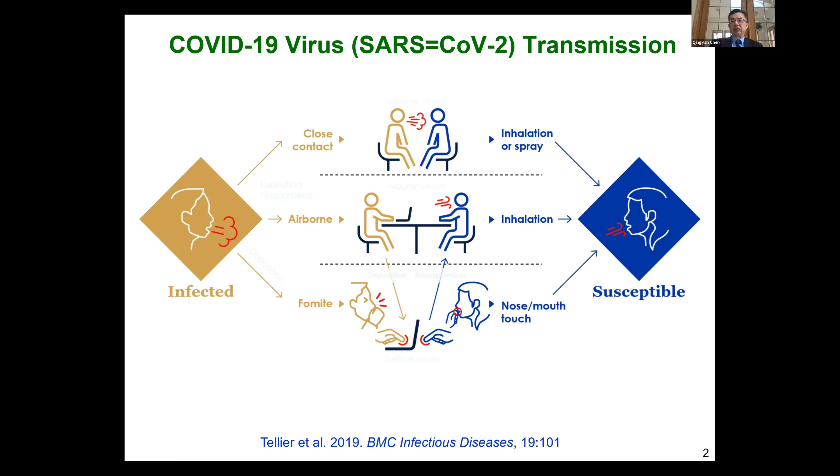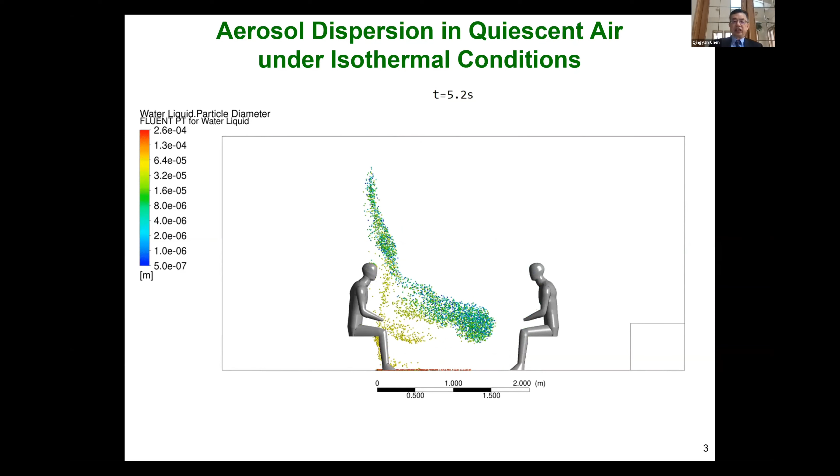However, you see those green particles, which are less than 20 microns. They can travel a very long distance, and definitely the 2 meters social distancing is not enough. And therefore, we are going to focus on this part, particle transmission.

However, this type of air supply is really terrible for COVID-19. That is because if somebody generates virus droplets in this cabin, they will be recirculated and brought to other passengers.

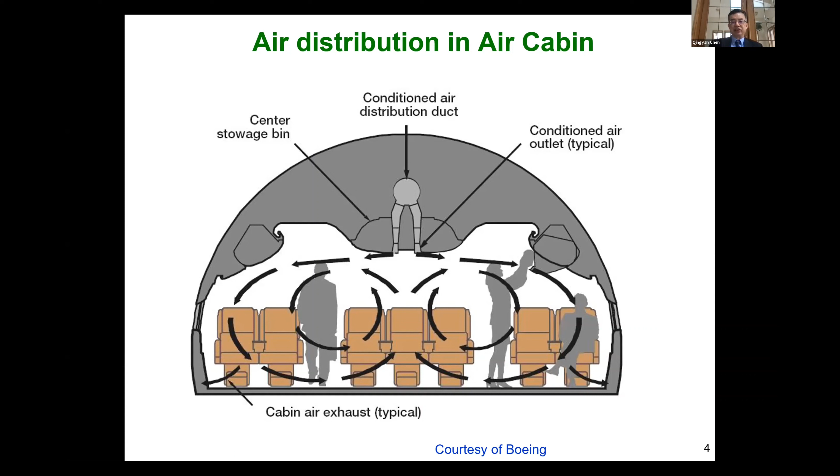And I'd like to use two examples to illustrate airborne transmission in an airplane. The first example is a much more proven example, because it has been studied by many people in the past. And this case is the SARS case in 2003, in a flight from Hong Kong to Beijing.

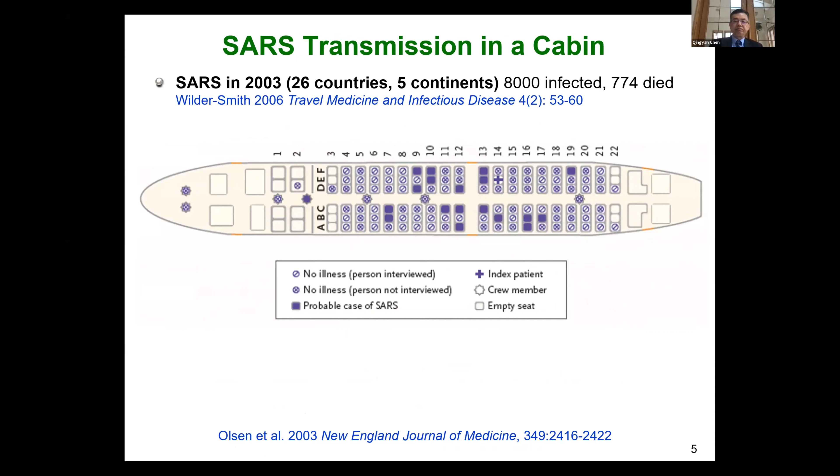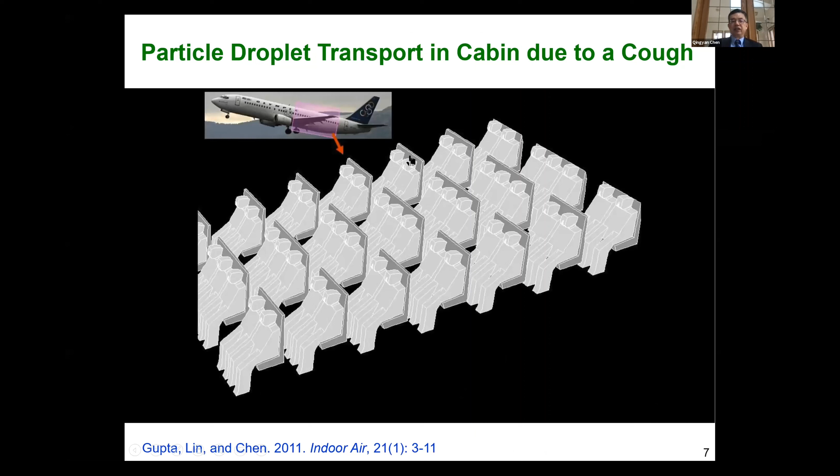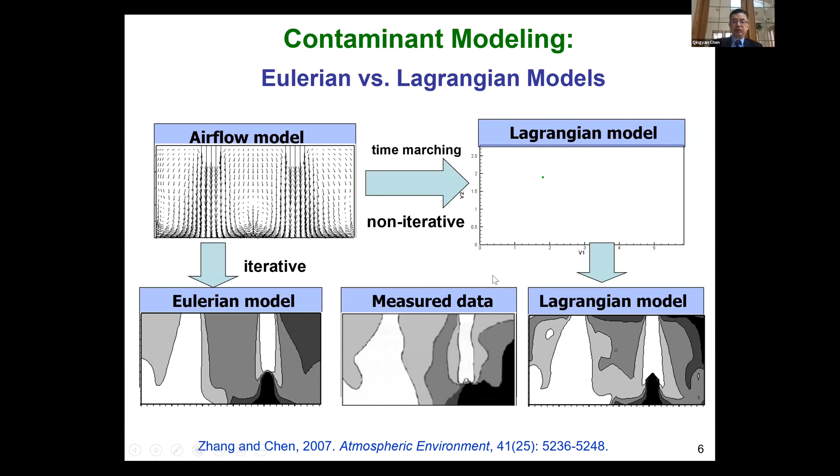Now we assume a passenger sitting in the middle coughs out particles of different sizes, and because of the air conditioning system, these particles will be brought to the ceiling and then go down on the side of the wall. Sorry, let's redo this. So the particles go down, and part of the particles will be exhausted through the outlet, but still many particles will be recirculating in this cabin for about 2 to 3 minutes. And this goes on and on for the entire duration of the flight.

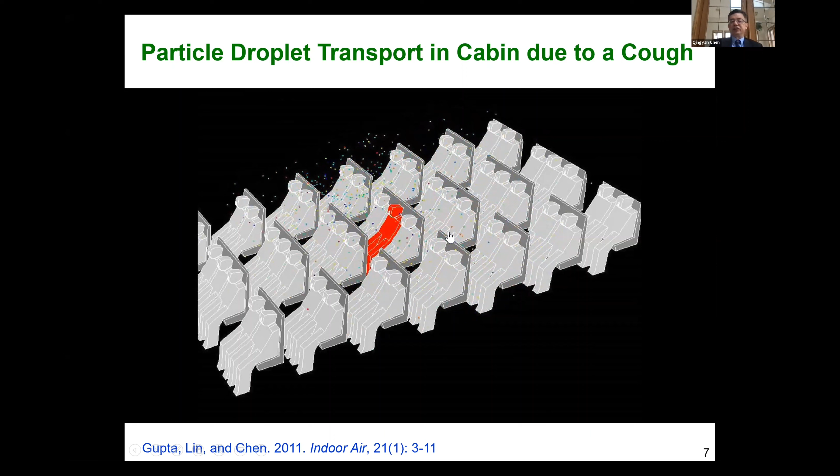But you also can see that these particles, generated in the middle of this row, get more and more dispersed. That means they can be dispersed to 3 rows before and 3 rows behind this infected patient. So this proves that if you sit with a sick person within these 3 rows, the risk of transmission is pretty high.

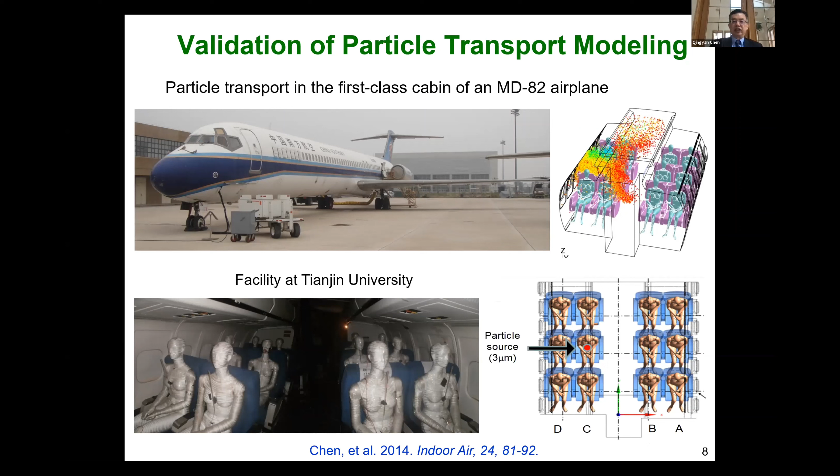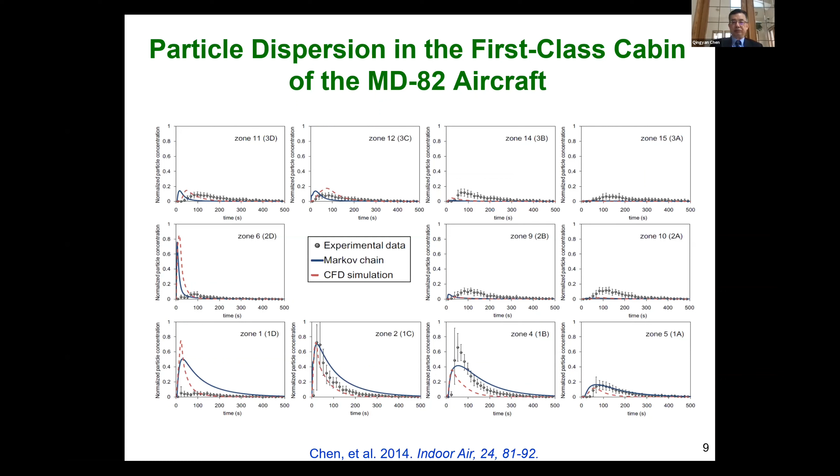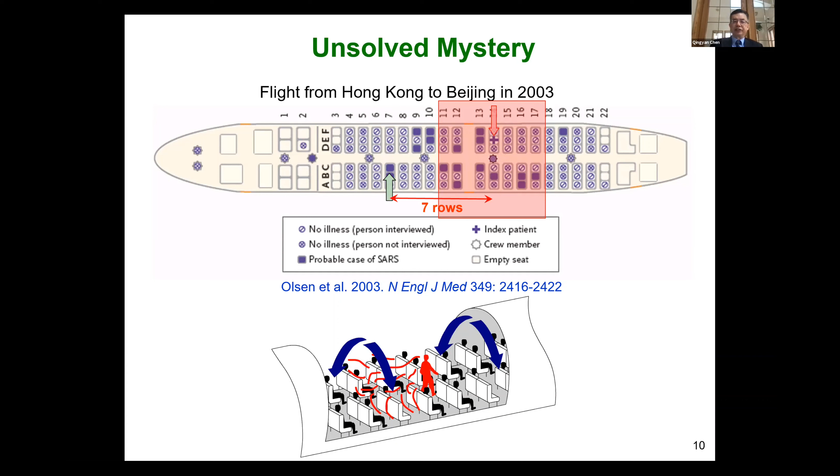So we suspect that the moving person in this cabin could cause the problem because a human wake could carry the virus. So to prove that, we did the simulation with a moving person along the corridor, and you can see his or her wake definitely carries a lot of virus, and this virus could be transported to people 7 rows away. This is an index patient there.

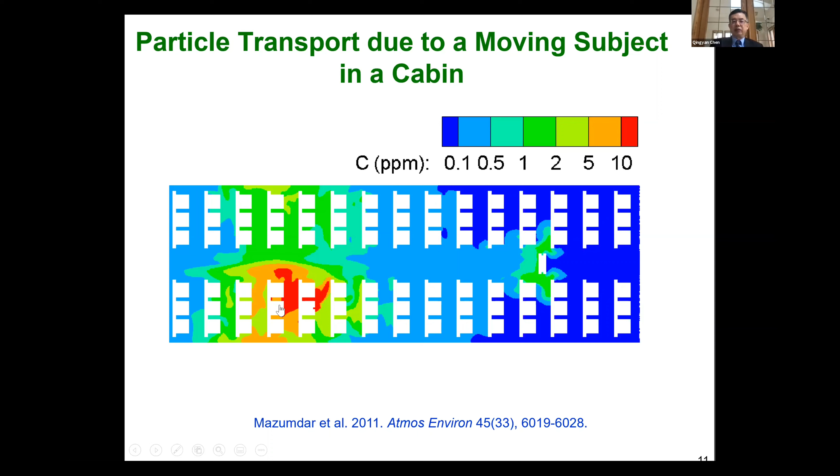Okay, but of course for this one, we couldn't really prove this is true because a lot of data was missing, and we cannot reproduce this. But this is just a possible scenario. Okay, then people can say that maybe in 2003 it's possible because SARS may be transmitted through airborne. But how about COVID-19?

And now, 1 year after COVID-19, we have enough information to do the scientific investigation. So we are using a Vietnamese flight from London to Hanoi on March the 1st, 2020. So that's 10 months ago. And there was a passenger sitting in the business class cabin who infected 13 fellow passengers. And we know that this passenger coughed a lot during this 13-hour trip.

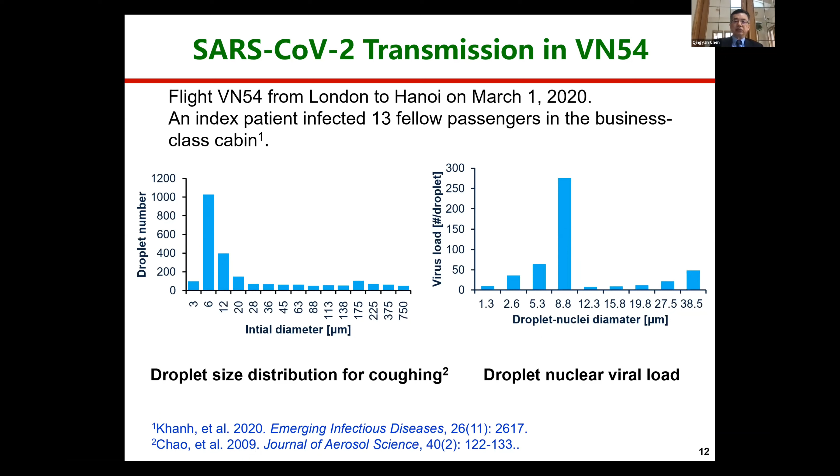So from the literature, we now know that when you cough, you could generate particles or droplets in different sizes, as you can see on the left side of this slide. And also we know the number. And then for each droplet, we also now know how many COVID-19 viruses are there. So with this information, we could simulate what happens in this business class cabin.

Because in this business class cabin, we have very detailed seat information. They are enclosed with a pretty high partition wall. And the index patient is sitting here. And now he is coughing. And then, of course, you can see this flow pattern. Again, on the left side is clockwise, on the right side is counterclockwise.

And you definitely see this droplet spread again, because this is a business class cabin, right? Their seat pitch is much larger. But you can see it's really more or less dispersed to the entire business class cabin. And what we have done, again, is with different particle sizes. Very large particles will not spread too far.

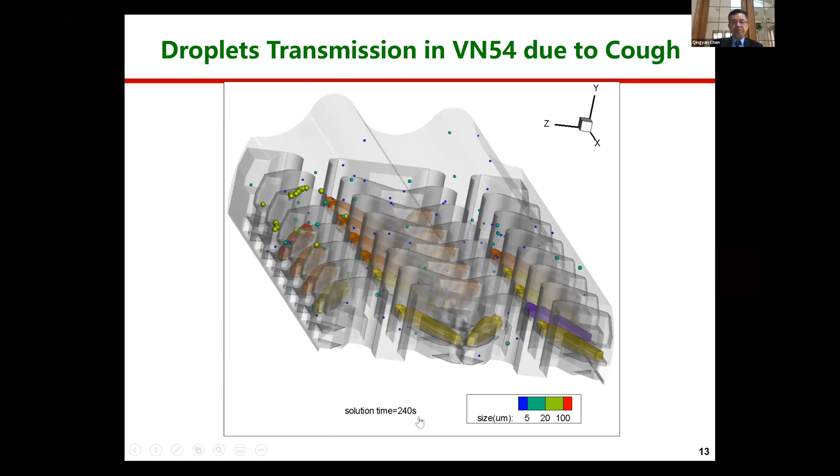And this is about 4 minutes. So this is more or less the same as what the airline tells you. Their air change rate is very high. In 4 minutes, the air becomes clean again. But of course, within these 4 minutes, this patient will cough already two or three times. Then with this result, we can calculate the viruses inhaled by all the passengers.

So the top figure shows the seats of this business class cabin. And you see the index patient is 5K, okay? And those in brown color are actual and also simulated infected patients. Which means the agreement between simulation and the actual situation is a perfect agreement.

However, our simulation shows the passengers 4A and 3G, which are in blue color, should be infected, but actually they are not. And of course, this might be due to different immune systems, etc., or your health condition. And we also find that 3D actually was infected, but our simulation did not show that. And those in yellow color were passengers who were not infected, both predicted and in the actual situation.

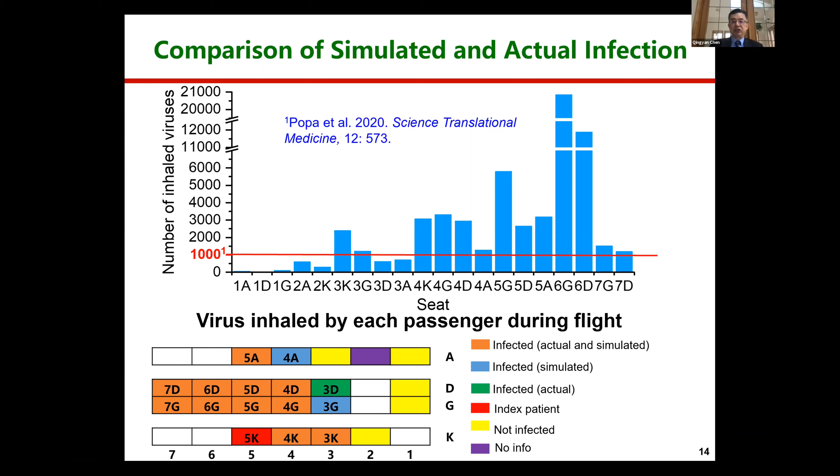So this again just proves that airborne transmission is there. Because especially in a business class cabin, people don't know each other, so they hardly communicate with each other. They don't have very close contact. So airborne transmission, we believe this is real. Now, what can we do?

Okay, we said that using masks, now in the USA, the government says using masks is important. And this is not a study done by us. Some other people did the study showing that with an N95 mask, the efficacy is about 90%. So if one person spreads like 1 million viruses, the mask will take 90% out. So only 100,000 particles will go to the air.

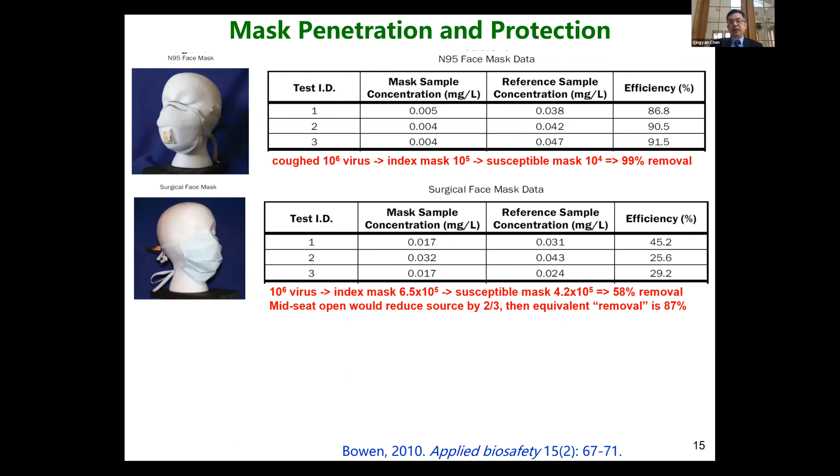And if a susceptible person also wears the N95 mask with an efficiency of 90, then the combined effect, you have 99% removal efficacy. And even with surgical masks, your total removal efficacy is about 90. But when you use a bandana or a cloth mask, then efficiency is very low, about 20%. So I do not encourage people to use the bandana or cloth mask. I think that the surgical mask is a minimum requirement.

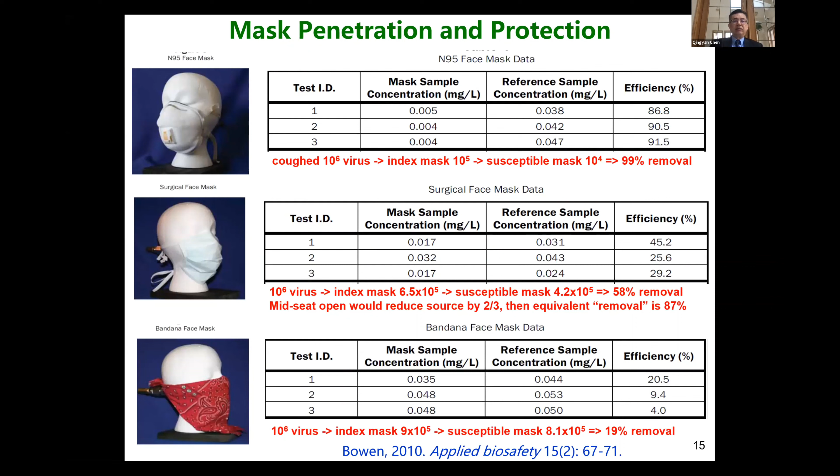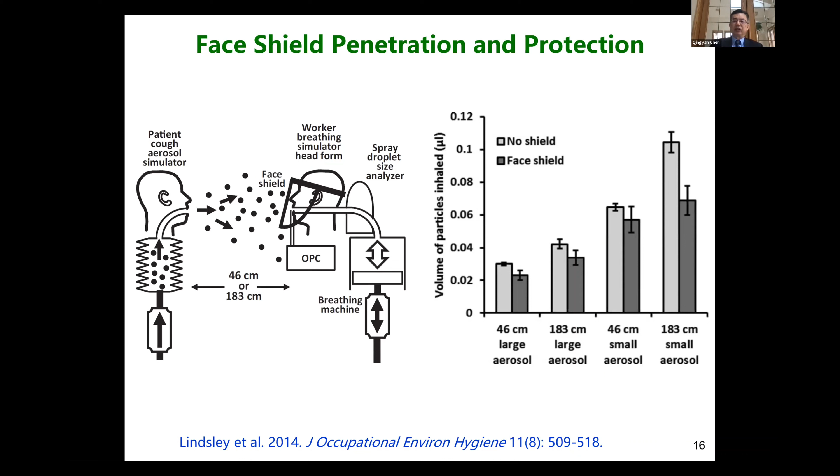But with the N95 masks, we see there's no problem at all. And therefore, wearing masks is very important. And now, of course, all the airlines mandate the passengers should wear masks. Otherwise, they will be forbidden to fly for the rest of their lifetime.

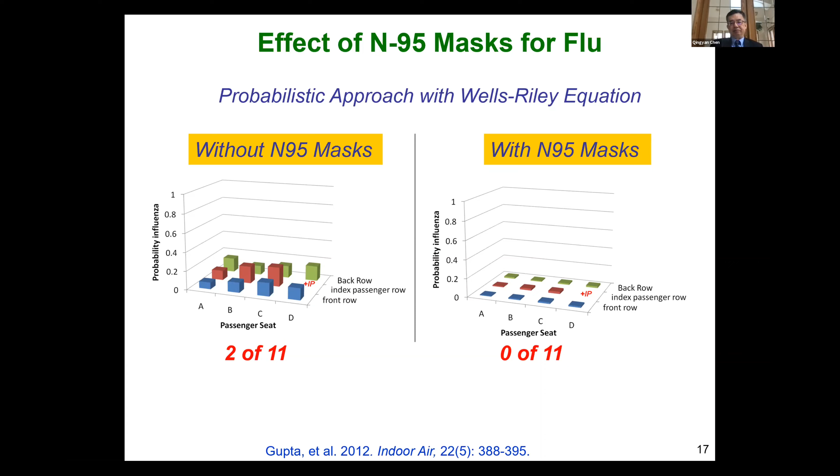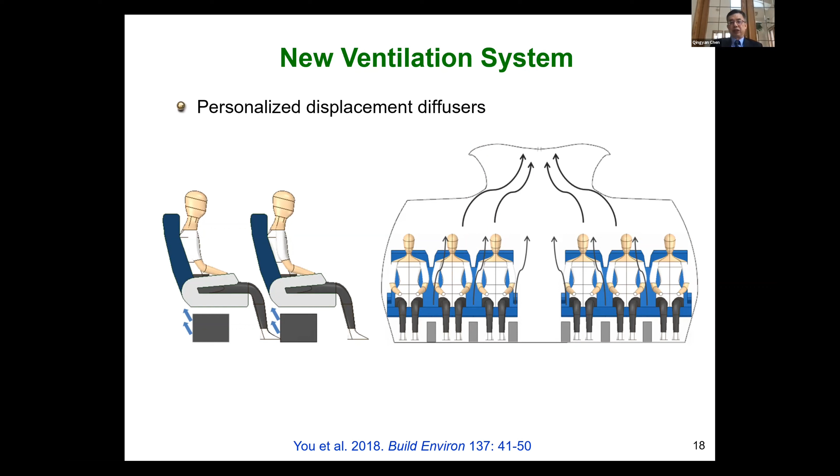So we don't try to mix. This is very different from the conventional design. But of course, you like the leg space. So therefore, we do not put this diffuser just in front of your leg space. We put it just somewhere between these two passengers, all right? So then your leg space is still there. Normally, in this place, you see the electronic boxes there.

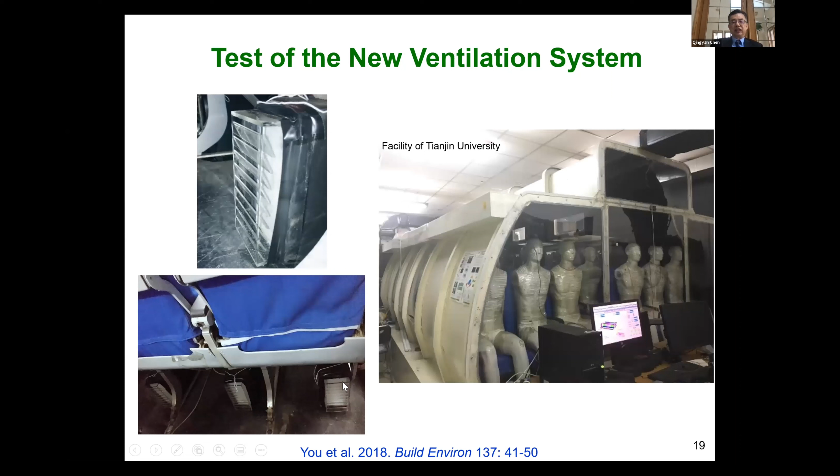And we also built a mock-up. We put the dummies in, and we have these air diffusers there. And the diffuser, you see the vents that supply the air upwards. And now I wanted to show you the result. Okay, so we use a Boeing 737 as an example. And we have an index patient to release the particles. And first I wanted to show you the current system, the existing system.

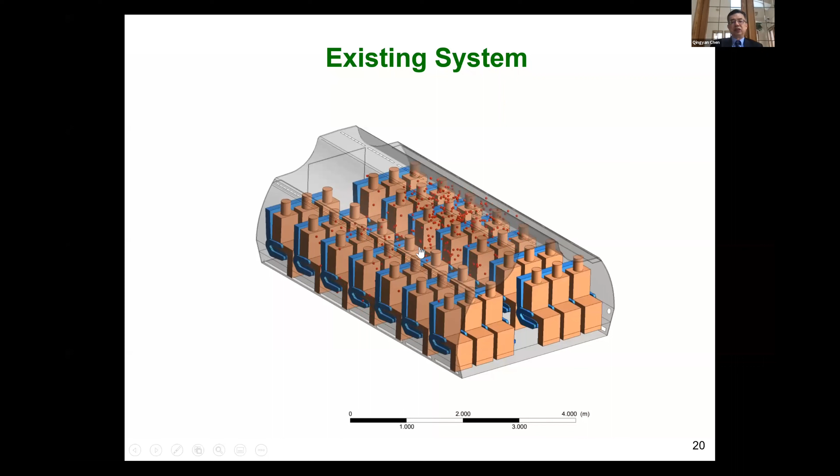So you see this particle goes up and then the air will bring it down. And because the air is fluid, the particles could go to the other side. And then this also gets transmitted along the longitudinal direction. So many people will get infected.

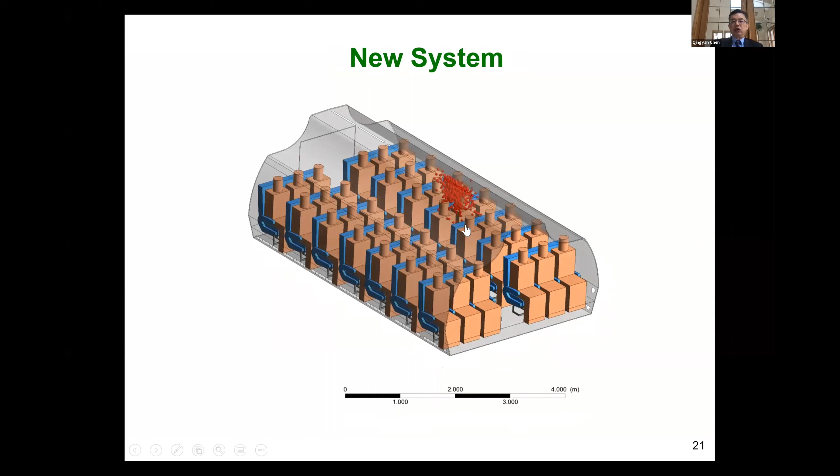Now with our new system, okay, we do the same thing. And because the air now is supplied in the lower part, and then exhausted in the upper part, you can see there's very few particles that could go to the other side of the aisle, and even the transmission along the longitudinal direction is minimal. And we have done further study assuming different source locations, could be on the aisle, in the middle seat, on the window seat.

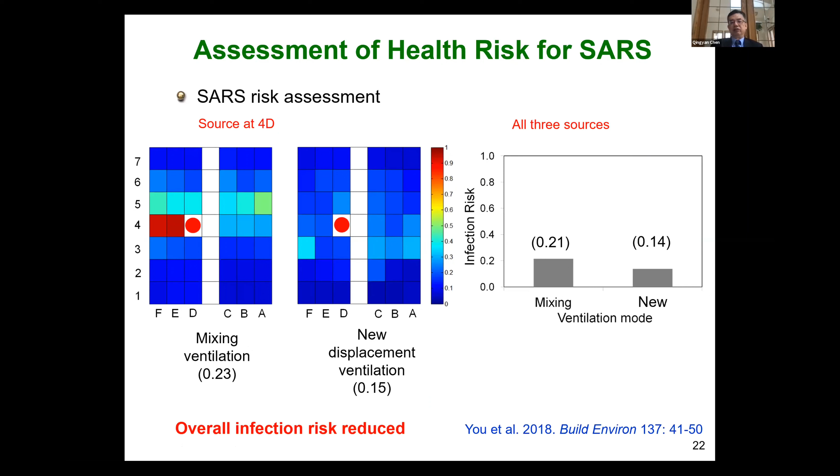So to conclude my presentation, we find that the current ventilation system in a commercial airplane has very limited longitudinal flow, but the particles generated from a cough or whatever could be transmitted 3 rows before and 3 rows behind the patient. And moving people in an airplane could bring the particles to many rows away. We showed you 7 rows away.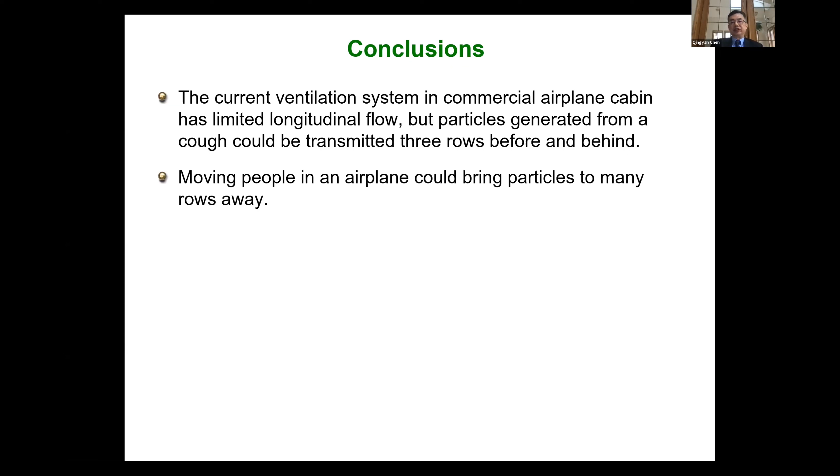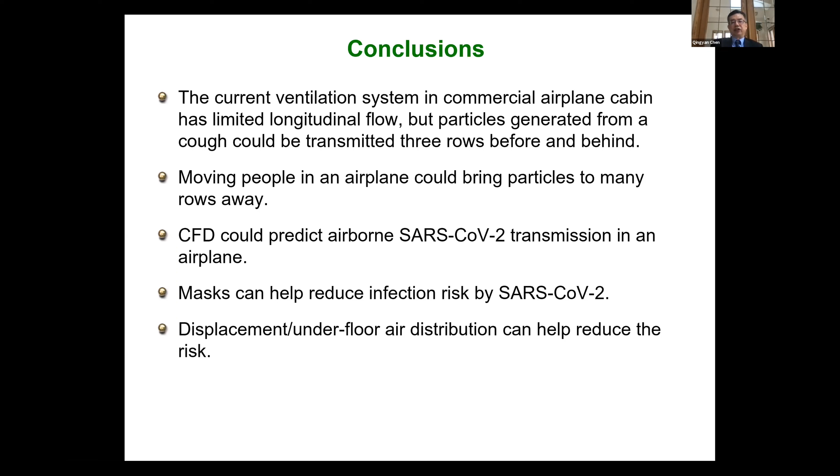And CFD could predict the airborne SARS-CoV-2 transmission, the COVID-19 virus transmission in an airplane. And using a mask can help reduce the infection risk. And the new ventilation system, we call this underfloor air distribution, can help reduce the risk.